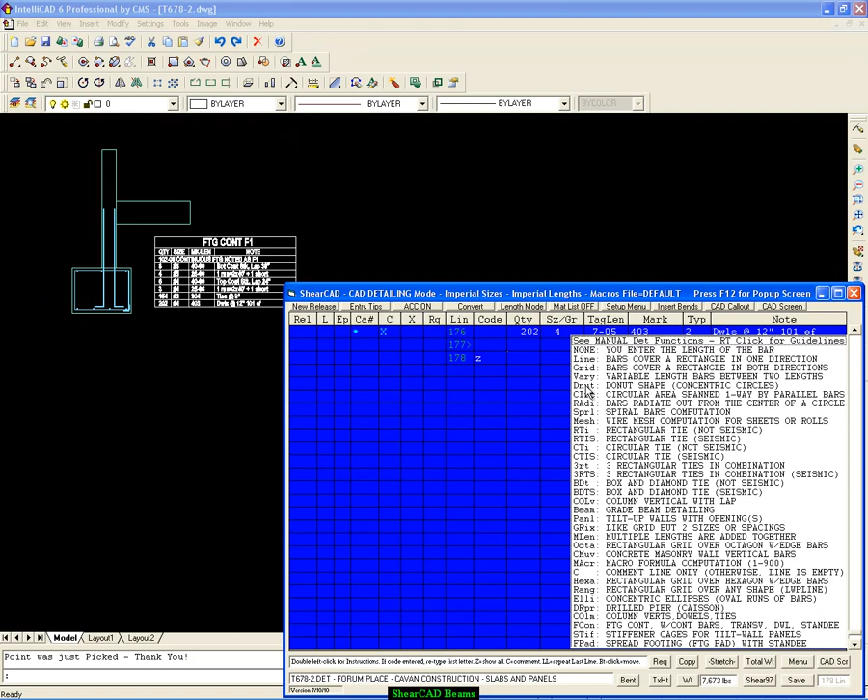This is a demo of the ShearCAD beams function. You can do three different styles of beams. One of the styles is our single span beam. That's what we're going to do first.

The other two styles are for continuous multi-span beams. One where the top bars in the first span overlap in the middle. The other style of multi-span beam, the top bars go all the way across the span and go into the middle of the next span. That's style 2. So we're doing style 3, which is a single span beam.

End clearance 2 inches. We're giving the support width left and right is 4 foot. Clear span 14 foot, etc. Given the top bar size, center bar size. You have variable spacing on the ties, so we're going to say there's 2 ties at 3 inches, 4 at 6 inches, and the rest are at 12 inches.

And again, coming in from the right, 2 at 3 inches, we call this B1 for the beam ID number. Top bars 3, bottom bars 4. We'll have 4 center bars, 2 left and right. Again, coming in from the right, we had 2 at 3 inches, and of course the 4 at 6 inches coming in from the right to make that symmetric.

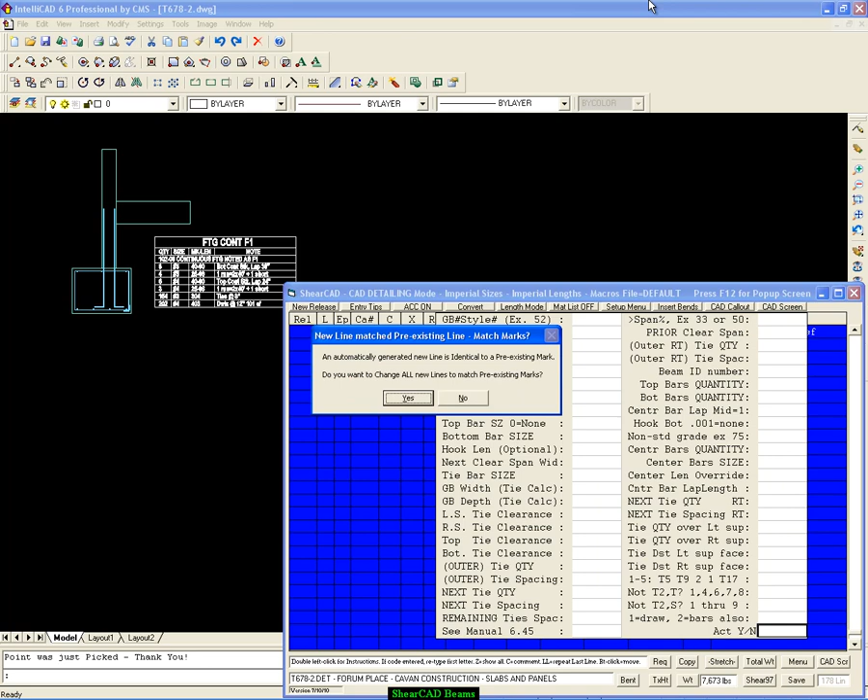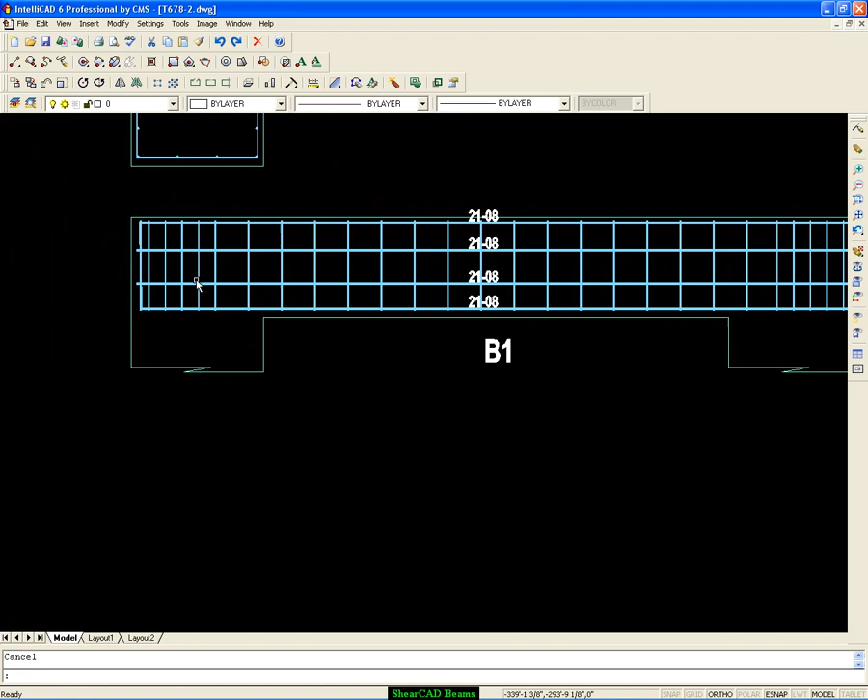We're going to pick a point. The point you pick is the lower left of what it's going to draw. So we basically get 3 different views. Here's an elevation view. Here's an end view. Right above it, here's the end view. And you see your 4 bottom bars, 3 top bars, and 4 center bars, 2 left and right in that view. And then there's a plan view up above.

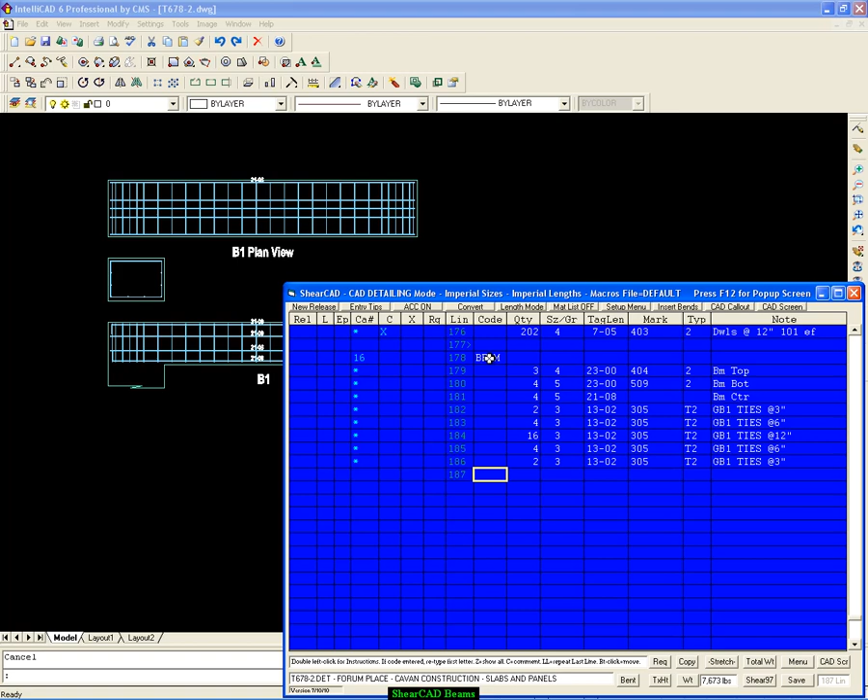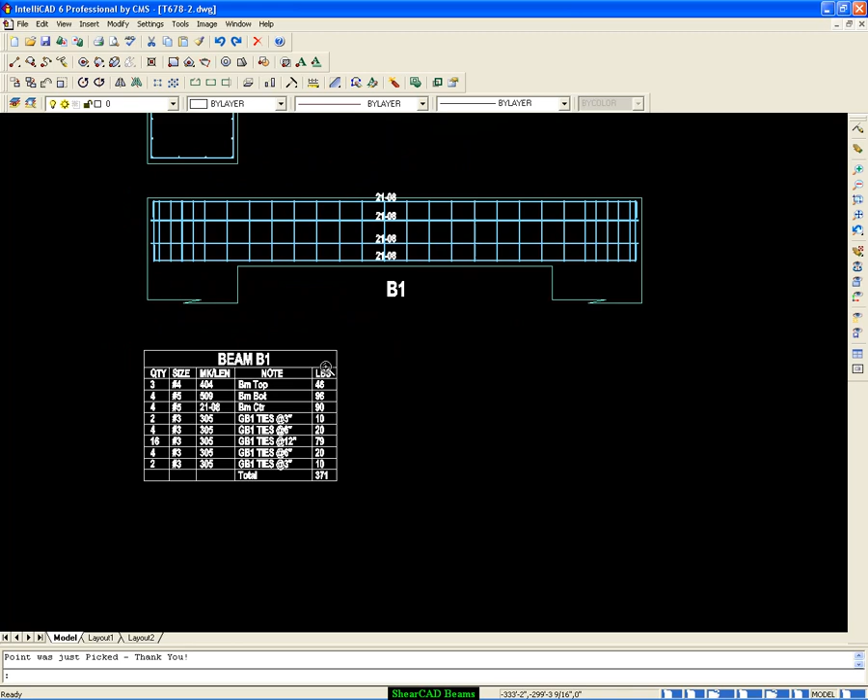We're going to call this out as a text callout. Again, there's many different formats you can choose. We'll put the weight in too. So it's going to have a column. We told it to include a column for the pounds of each bar and of course the total. So there you have single span beam B1.

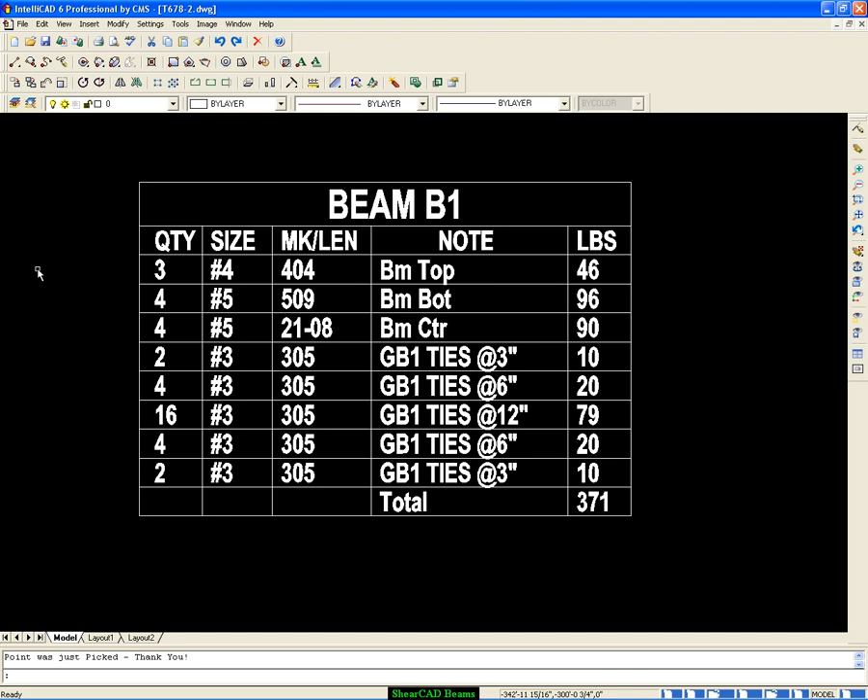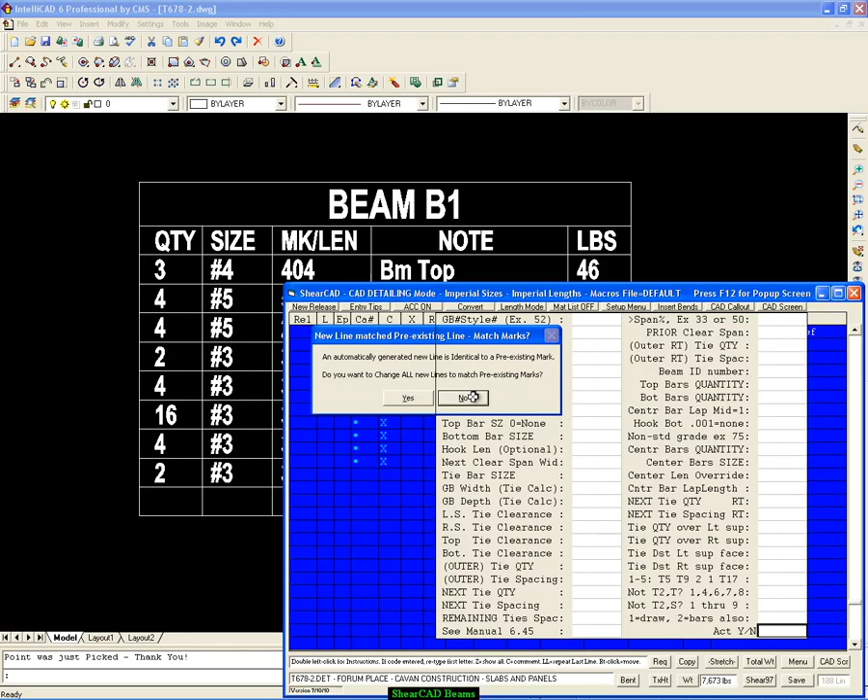Now we're going to do a multi-span beam. It's going to be style 1. And we can use a lot of the inputs from the previous one. Since it's a multi-span, we're going to give the next clear span width. I'm going to call it B2. We'll pick a point, that's where it's going to draw it. So there's the first, the leftmost span of this multi-span beam.

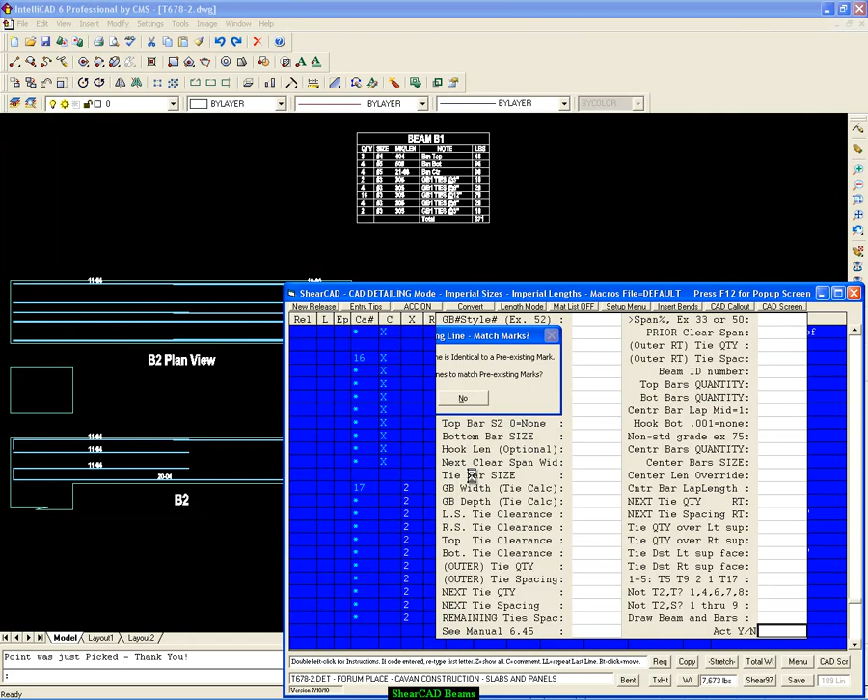I neglected to put a 2 in there. We're going to put 2 in there because let's say it's a real nice case where you have the left and right spans are the same, and therefore we're just going to double up on the bar. The only reason I'm running it out again here is just so it sets a 2 in the X field, which is the times field, in all those lines. I should have done that first, but now it's good. So it's got the times in there for all those lines so that the bar list ends up right.

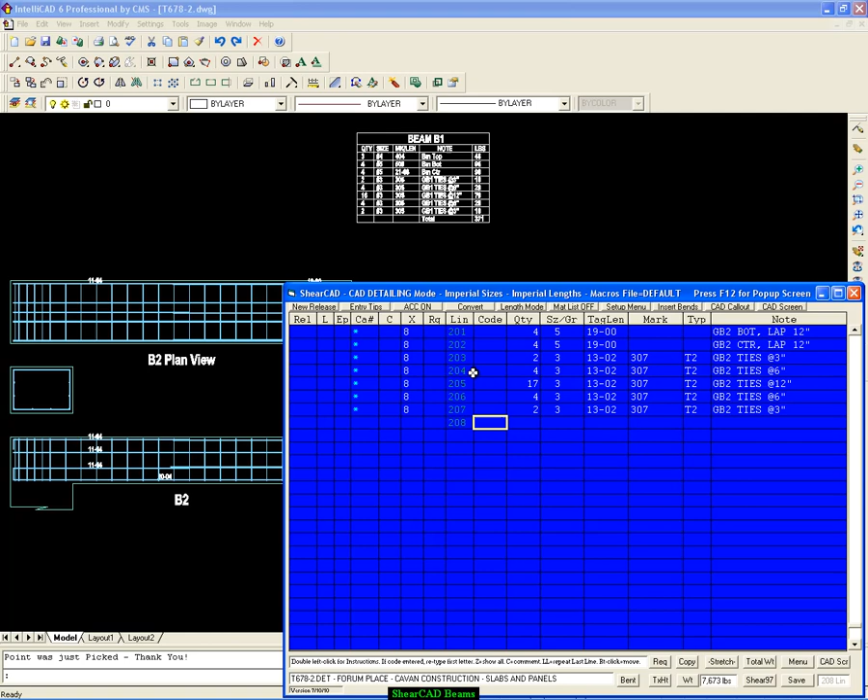Okay, now we're doing the second span, and let's say it's a real nice case where you have 10 spans and we're doing the 8 middle spans. So let's set 8 in the times beforehand. There's really nothing we have to change in the inputs, except we forgot to tell it to draw it. Whoops. So let's go back and say, let's draw that. It generated all the bars in a dark blue screen, but it didn't draw it. There we go. Tell it to draw it.

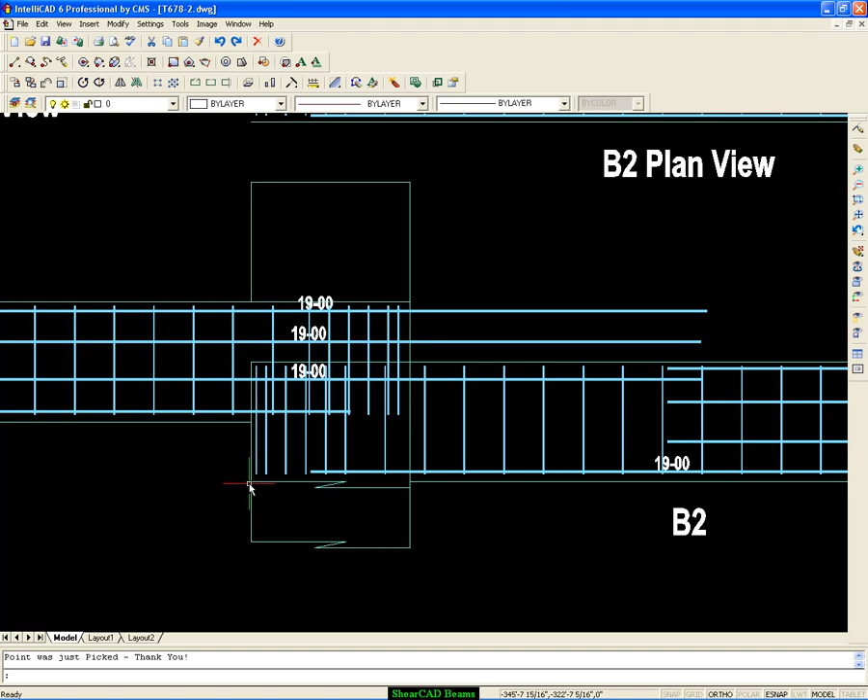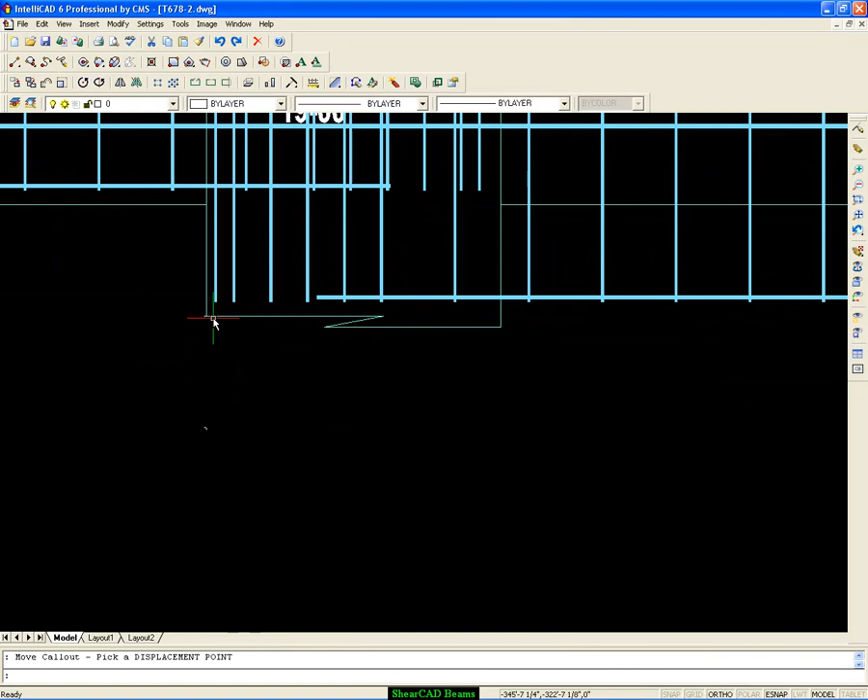Let's try to match this up with that first span. I did not do a very good job of that, so we'll move it into place. How do you move it? Just go to the blue screen, single right click on the beam function, and it says, oh, you want to move that? Okay. Give me a base point and then a displacement where you want to move it to. That's better.

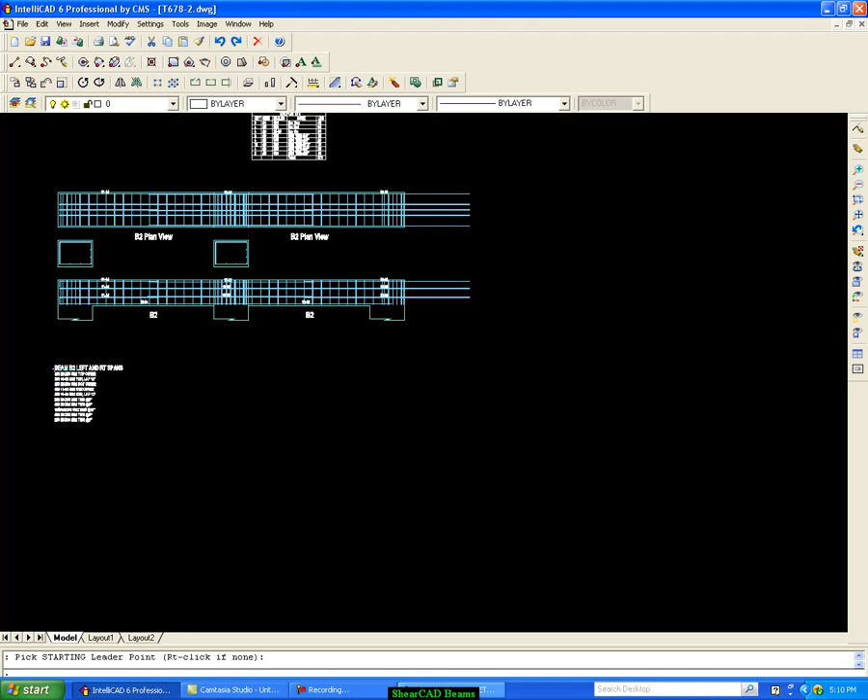Now we're going to do a text callout. Let's give it a heading. Beam B2. This is a left and right span. Pick a point. The point you're picking is the upper left of that callout. And there's the callout. Oh, that's not quite the style of callout I wanted. That was a detailing format. Let's pick the one where it draws the boxes and all that. It looks real neat. Okay, so that callout's done.

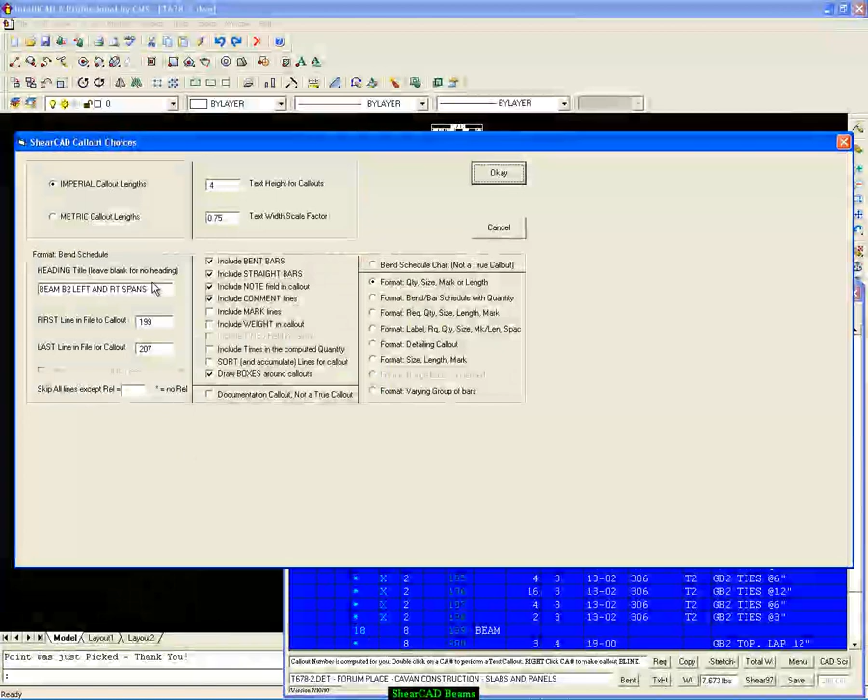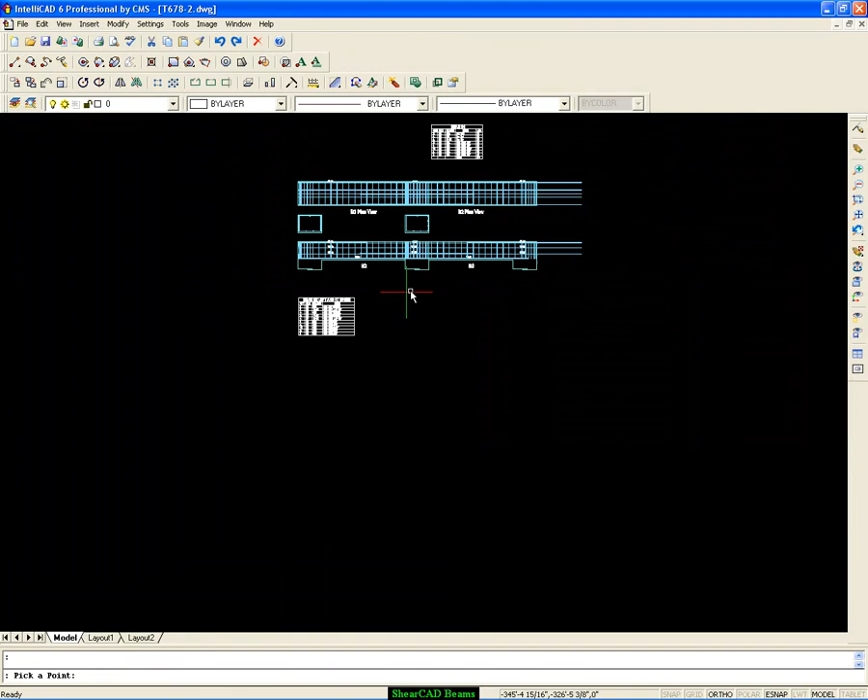Now we could include the times field. There's a checkbox in the callout where we could include the times. For instance, in this case, it'd be 8 times. So you can include the times column in this text callout if you want. We're not going to do it here, but you could do it. Pick a point for your callout. There you go.

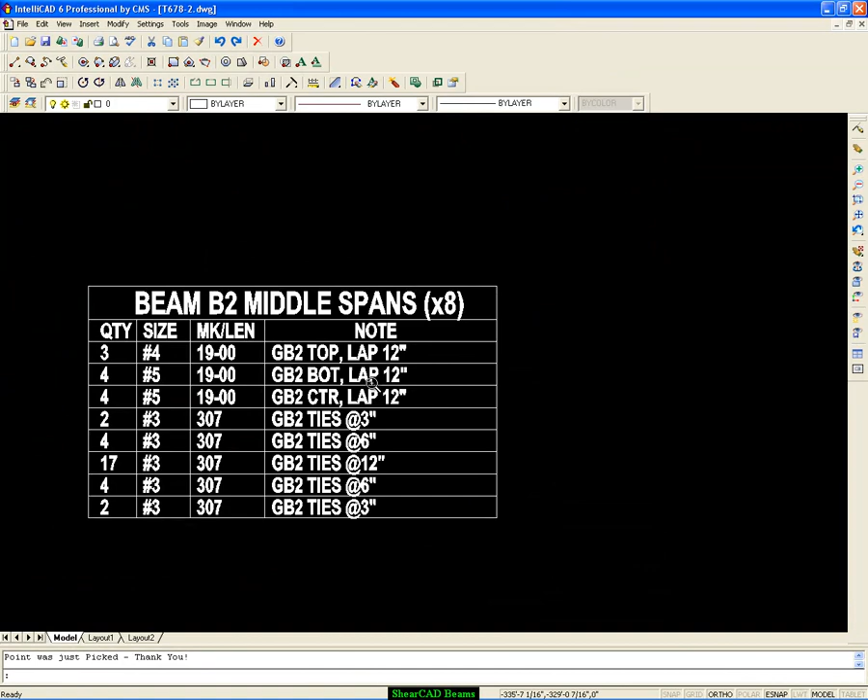And that's the end of our ShearCAD Beams function demo.